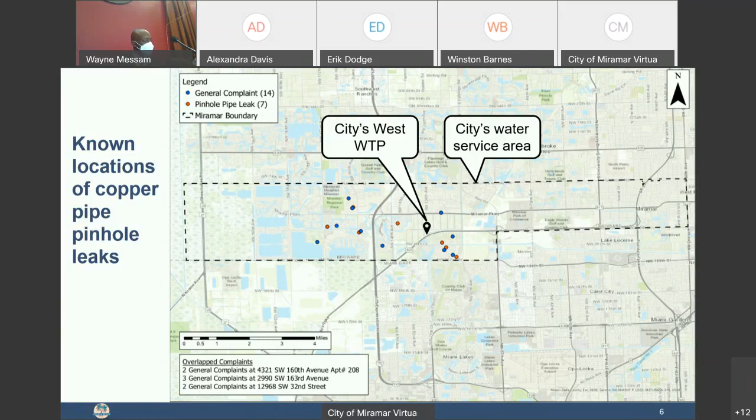This afternoon, we want to provide you with a status summary and an overview of the water treatment plant. Kimley-Horn will be providing a water quality review. Hazen and Sawyer will provide a review from a national perspective. And then I'll be back with you with some final recommendations.

But before we move forward, we do want to highlight some of the actions that our city has taken to date, some of the best management practice actions that we've employed.

The city has performed an operational review of our entire system. We met with the Florida Department of Environmental Protection. We retained experts from Kimley-Horn, national water treatment experts. We retained experts from Hazen and Sawyer, national water treatment experts. We collected samples of pipe with pinhole leaks throughout our service area. And we collected data on locations where pinhole leaks have been reported.

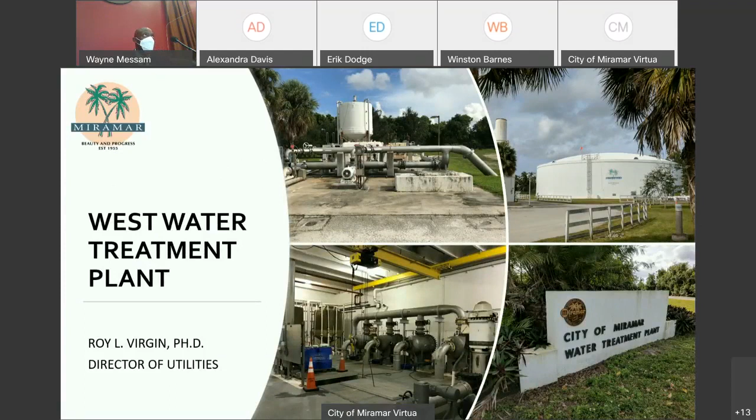I want to start by giving you an overview of the West Water Treatment Plant and also look at some of the water quality control parameters and some of the testing that we've done.

From the get-go, let me start by saying emphatically that the City of Miramar provides drinking water that is in total compliance with all the local, state, and federal standards, which include copper corrosion regulations. In addition to that, we have tested over 20,000 water quality tests per year to ensure the safety and protection of our residents.

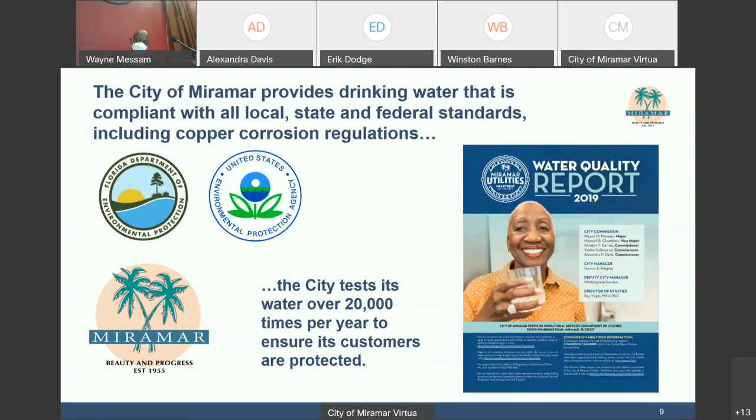So, the West Water Treatment Plant. This plant operates using what is called membrane softening technology in the treatment process. The plant was commissioned in about 1995 and since then has gone through several expansions. Total capacity of the plant is about 11.75 million gallons per day.

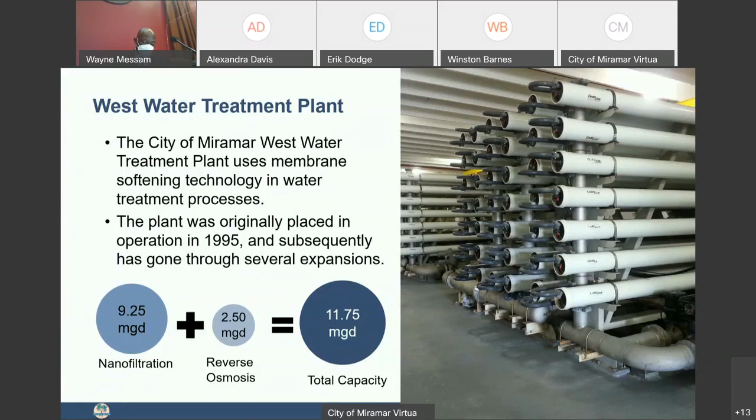Of that, 9.25 million gallons is from the nanofiltration process and 2.5 million gallons from the reverse osmosis treatment, combination of 11.75. So the question that residents may ask is, where do we get our water from?

Where does Miramar get its water from? So, Miramar water comes from really two places. One is what we call the Biscayne aquifer, and two, the Floridan aquifer.

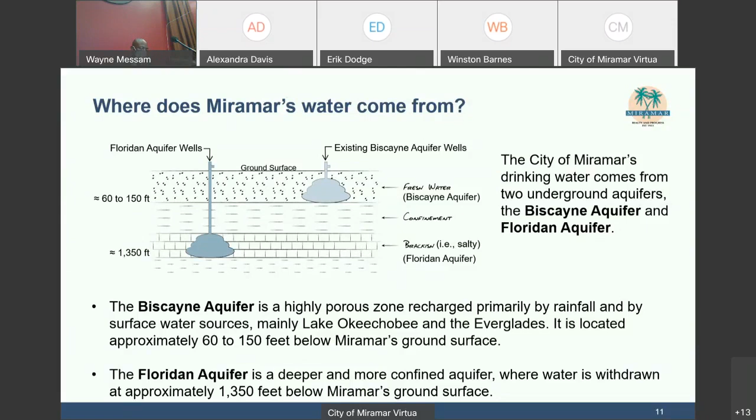These aquifers, the Biscayne aquifer, is a highly porous zone charged primarily by rainwater and surface water, mainly from Okeechobee. It is about 60 to 150 feet below our feet here in Miramar. In contrast, the Floridan aquifer is a deeper and more confined aquifer where the water is approximately 1,300 feet below the ground. So these are the two aquifers that the West Water Treatment Plant gets its water from.

So let's look at some of the characteristics or what the differences are in both freshwater systems where we get our raw water from. What we did, we examined approximately 9 parameters and looked at the comparison so that the resident can have an understanding of what is the Biscayne aquifer, what is the Floridan aquifer, and what are those water qualities. So we look at the pH, which is really potential hydrogen.

We note that for the Biscayne and Floridan aquifer, Biscayne is 7.17, or approximately 7.2 pH, and the Floridan is approximately 7.7, a little bit above neutral on the pH scale.

The conductivity, which we'll note on the Biscayne side, is about 732 microsiemens per centimeter. However, on the Floridan side, it's approximately 5,000. That's a huge difference. Remember, I spoke earlier that one is about 60 to 150 feet, and the Floridan is up to 1,300 feet. So one of the reasons why we check for conductivity is because it's the ability of water to pass electrical current. And also, as conductivity increases, so does salinity, or salt.

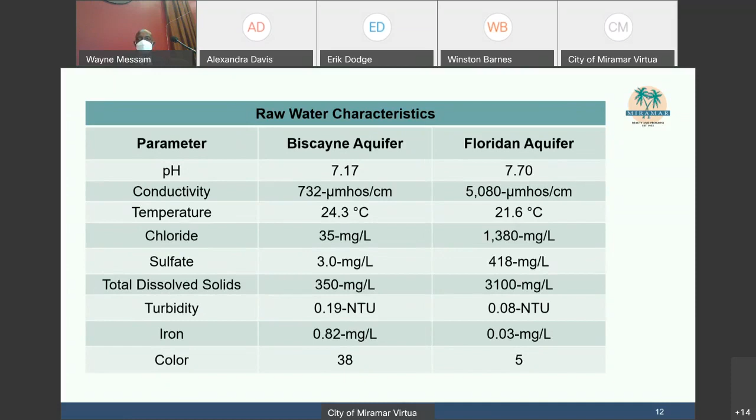We check turbidity, iron, and color. Those are pretty much within range. This chart here is really a flow chart. It shows the process, and in blue you can see that's the nanofiltration side, and in orange is the reverse osmosis side.

So what you see is that in the blue, we get the water which is the nano, from the Biscayne aquifer. From the Floridan, which is the reverse osmosis, we got the water from the Floridan well. It passes through pre-treatment, then into the membranes. Then what's left, we pump that reject water back into the ground about 3,000 feet. Then the water we need, called permeate, is not totally finished.

It needs some addition of what they call post-treatment from both sides, so it's blended in what we call the clear well. Then there's addition of disinfectant, fluoride, inhibitors, all that stuff added to it.

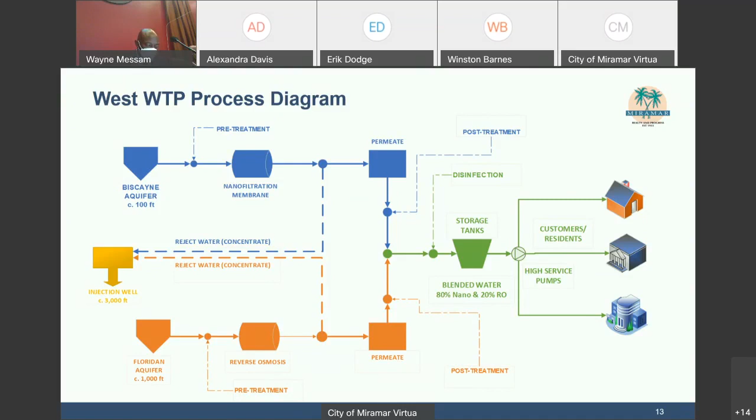Then from there, it goes to the holding tank. We have pretty much two on the west side, two storage tanks. We have 4.2 million gallons on site at the plant, and 3 million west of the 75. From there, it's pumped through your high service pump to your residents and customers. So that's the overview of how the process works.

Now, that is the hard work. But we can't make the water without having some quality control checks, and the water must follow the regulations set forth by the state and federal government. We can't just produce the water and send it out and say drink the water, use the water. It has to follow the guidelines set forth by the state.

So the City of Miramar has a certified water quality lab, certified through the National Environmental Laboratory Accreditation Conference and the Florida Department of Health. The lab holds approximately 85 fields of accreditation or certification in different areas such as microbiology and chemistry, and is certified to analyze drinking water, domestic wastewater, solids, and chemicals, and so forth. To the bottom right is a copy of the certificate from the state. So how do we monitor the water that comes through?

This is before I bring Kimley-Horn to speak on their side of the water quality. How do we monitor the water? The water quality is monitored continuously, done through a number of instruments, analyzers, different kinds of instruments that check different parameters.

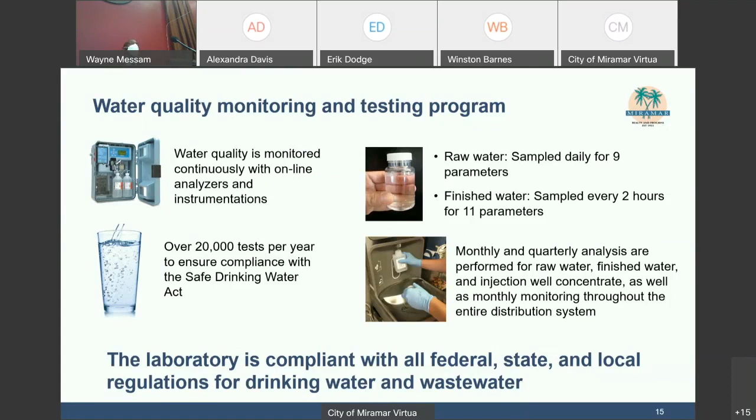But let me close before Mr. Kimley-Horn comes in by saying that the lab, the City of Miramar Water Quality Lab, is in full compliance with all federal, state, and local regulations for drinking water and wastewater. I want to thank you, and I'll have Kimley-Horn speak on water quality.

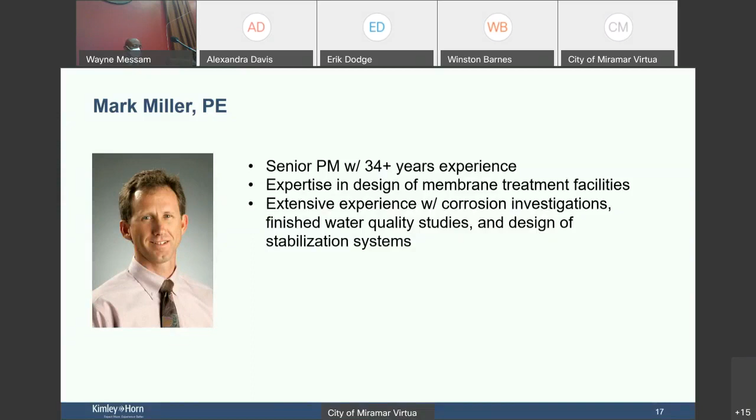My name is Mark Miller. I'm with Kimley-Horn, been with the company 35 years. Most of my experience is in treatment facilities, very similar to the system you have, a consolidated system with 2 different treatment plants, unlike any others in the state of Florida, with extensive experience with corrosion inhibitor studies and whatnot.

So I'm going to do a brief description of the water system. Roy did it pretty well. You have 2 regional water treatment facilities, different capacities, consolidated, serving both systems.

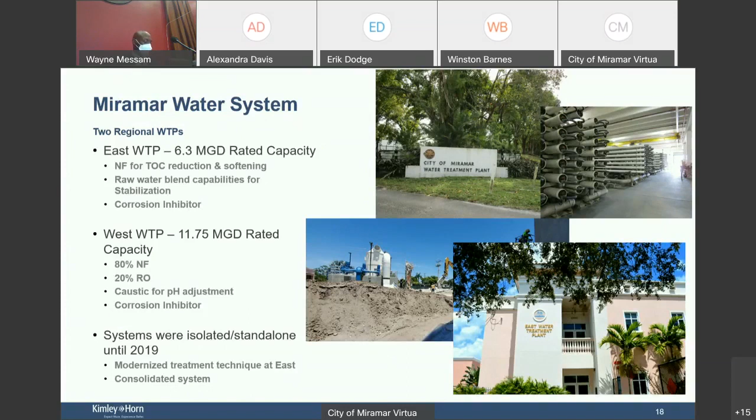These systems were isolated prior to improving the East water treatment plant and adding corrosion inhibitor to the East plant, and they are currently consolidated.

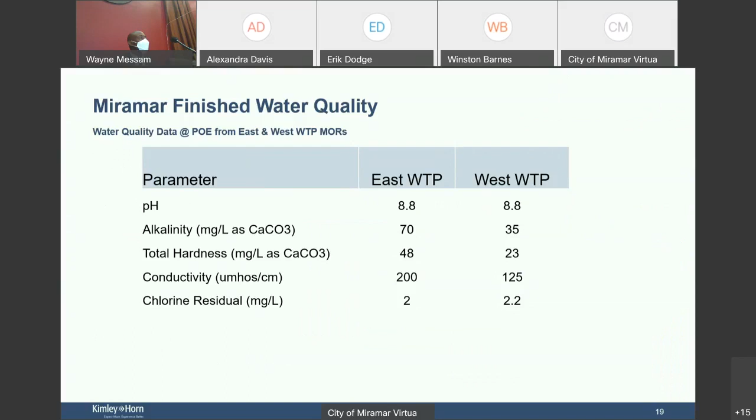This gives a snapshot of the existing water quality leaving both facilities. Most parameters are consistently the same: pH, chlorine residual. Alkalinity and hardness are a little different, but not any different than other consolidated systems in South Florida. One key issue is that this water quality is consistent; it's the same leaving both plants and doesn't vary much with the older conventional treatment technology we had before.

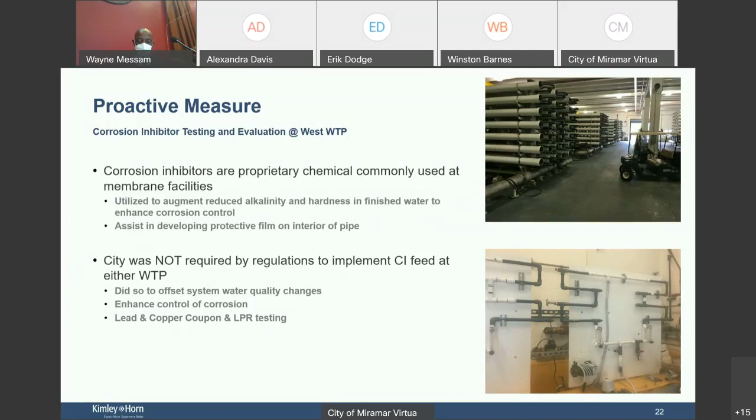It should be noted too that the city was not required by regulation to implement this, because as you could see by the lead and copper results, you're in compliance. But the city proactively offset the system water quality changes that would occur when the East plant came online and those valves were opened and connected, consolidating the system. Essentially, it was enhancing control of corrosion when the East plant was brought online and combined with that system.

With that, we were engaged with the city to conduct a corrosion inhibitor investigation and testing at the West plant. The goal was to enhance control and mitigate any corrosion. Corrosion can and will occur. The city understood finished water quality was going to change with the treatment change at the East plant, and that was the purpose behind this effort.

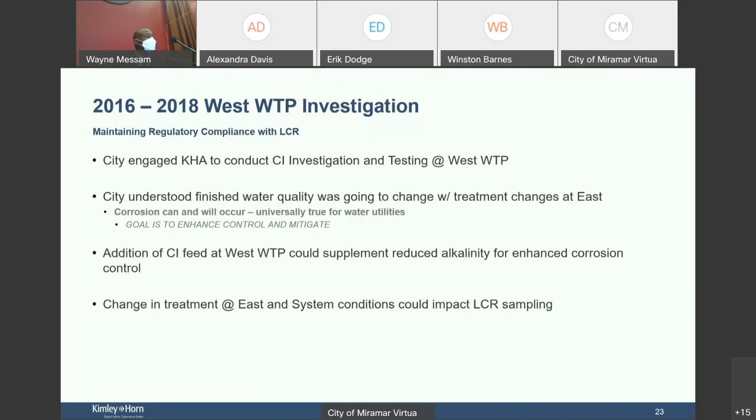The addition of corrosion inhibitor feed to the West plant could supplement reduced alkalinity for enhanced corrosion control. Corrosion inhibitor does add alkalinity to the system, and that was an important element. We knew that the change in treatment at the East plant would affect, or may affect, the LCR results, so that's why this was started.

When it first started, a desktop water quality evaluation was conducted. With our experience with many other treatment systems and utilities throughout South Florida, we identified other facilities that dealt with these issues, such as systems in Indian River County and Martin County utilities up north. They're very similar to your system.

We next conducted pilot testing using finished water from the West plant, injecting different corrosion inhibitors into the finished water, and then measuring corrosivity via gravimetric methods, weighing samples into coupons, and using an electronic version to look at what corrosion rates occurred with lead and copper samples. These were true, real coupons used in the testing.

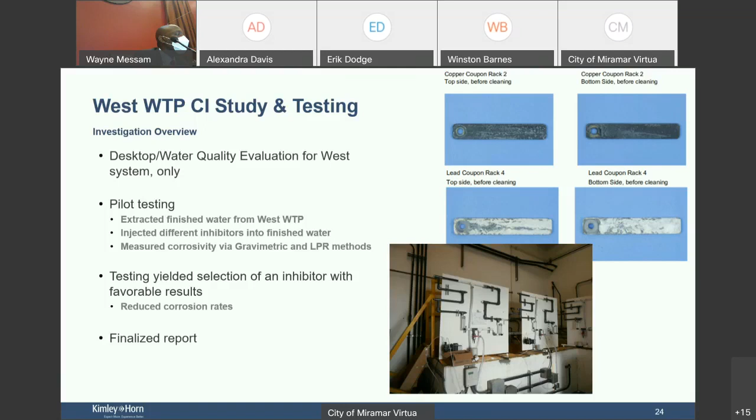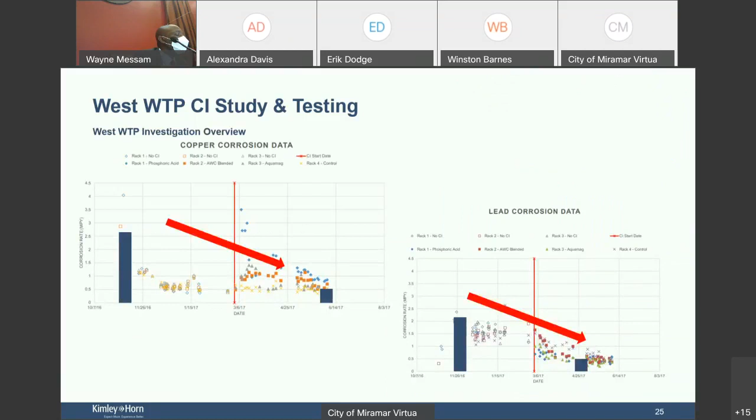What we yielded was a selection of inhibitors with favorable results to reduce corrosion rates. We just recently finalized that report. This is a snapshot of the results of that data, showing copper and lead corrosion did decline. The dots show the different types of corrosion inhibitors tested—phosphate, polyphosphate, different blends—but in the end we used the one best suited for that facility. You can see when it started in 2017, it did decline over time after adding that corrosion inhibitor.

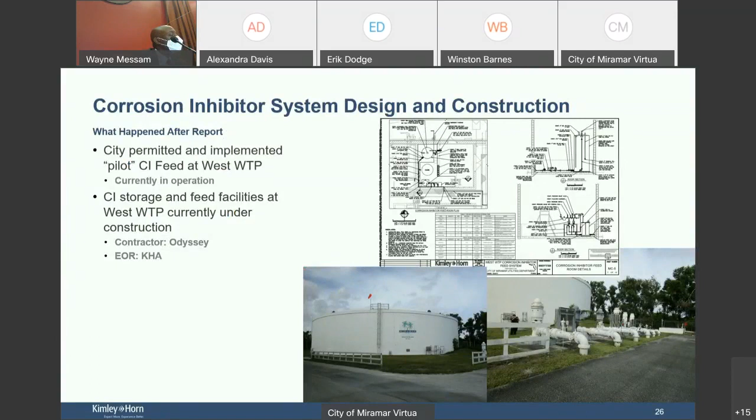Where we are right now: after the report, the city permitted and implemented a pilot, basically the corrosion inhibitor feed system continued feeding at the West plant and has been feeding since then. Currently implementing permanent storage and feed facilities at the West plant, currently under construction, with Odyssey and us as the engineer of record.

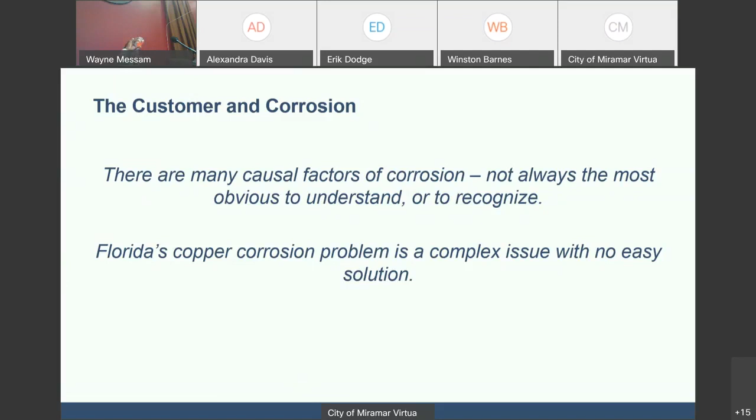Utilities themselves have a tremendous amount of infrastructure that's part of the financial health, so to speak, of any community that's a water purveyor. You have a tremendous amount of infrastructure that's out of sight, out of mind, but a lot of it is metal components. It's subject to corrosion because water is a solvent and it likes to dissolve metal and other things into it.

Because of this infrastructure, utilities themselves practice corrosion control because they need to protect their infrastructure, and in addition, they need to protect the consumer from exposure to contaminants.

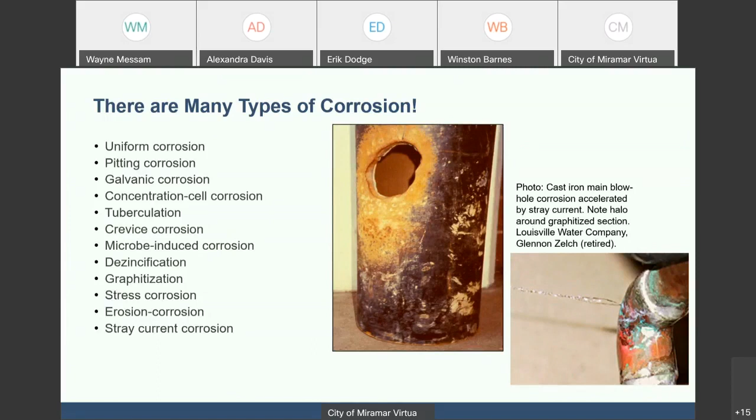The other picture shows corrosion leaks, and there's different types of leaks. You see it's an elbow. Water itself erodes—look at the weathering of rocks, mountains are removed over long periods of time, and they get eroded. Here's a picture of a copper pipe that had some erosion of the metal, which caused a leak. When you put a pipe in a home, it may take many years for you to see the leak. We're going to talk a little bit about how that happens.

Next slide. Here's a picture of a pipe that's been longitudinally cut. If you look in the literature, you can categorize 3 major categories of causal factors: dissolution, abrasion, and maybe metabolic activity, meaning microbial. We are a living planet, so there are microbial organisms that are in everything.

Some examples are like the water quality pH. As long as you have alkalinity in the water, it's not often a problem. Flux corrosion, workmanship, dissimilar pipes—a lot of different things can play into these factors, and no one issue is the causal factor. I'm going to talk a little bit about stray electrical current and lightning briefly, because Florida has the most lightning strikes in the world.

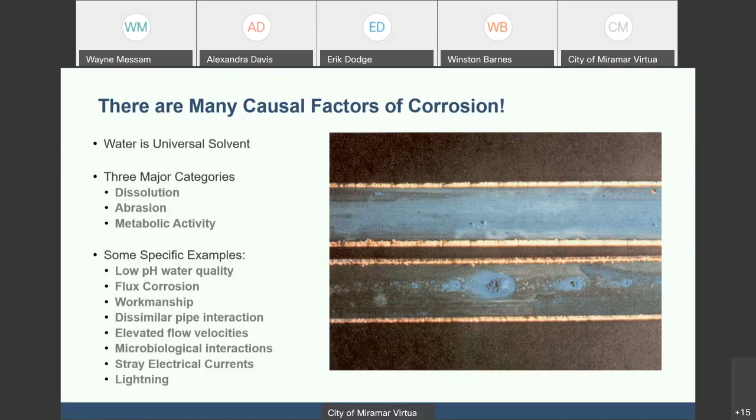There are factors that affect the way that we do our plumbing, how it's installed in a home. We're obviously in a warm climate where we use air conditioning a lot, but we do have a season that is very warm.

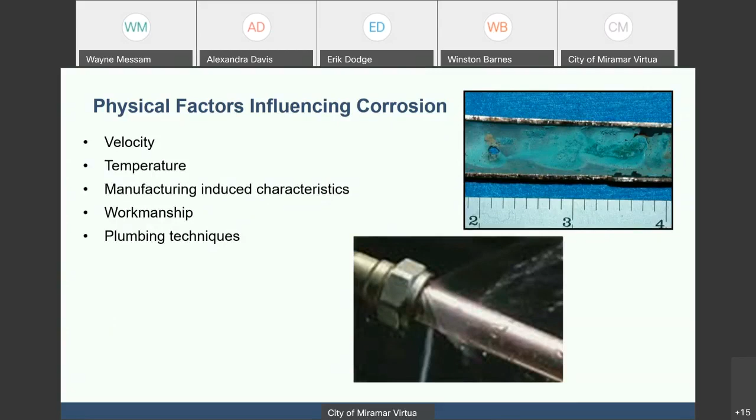Manufactured induced characteristics - we have workmanship issues. In fact, some of the peer review literature has shown that one of the major factors that contributes over the life expectancy of a home itself is anthropogenic, which means human interaction. And that's rarely discussed when we get into these issues where people emotionally respond to problems with their plumbing.

Next slide. So I want to share with you a couple of stories, at least my experiences with dealing with this issue and with people in their home. A major understanding is that people's exposure to a contaminant in a public water system is involuntary, which means that the federal government, the local governments, the health department, the regulations are there to protect the public when they drink water out of a water supply. Makes sense, right? And the amount of effort that goes into that is a huge effort.

So here we have a couple of different stories. So, pitting and the dead pine - that was in Polk County, Florida. There was an area in the Imperial Lakes water system, this is like 20 years ago, people were getting pitting corrosion in their home. And the utility, I would go out with the utility and we'd go meet with some of these people. A lot of them are elderly, retired, on fixed income. So when they have a major problem with their home, it's a big deal because of the financial impact on them, let alone the emotional impact.

So it turns out I go into the one home with the utility and this couple, and they're very nice. We talked to them after a while. It's a beautiful home, but the shades are all closed. Finally, she opens up the shade, and there's a slash pine in the backyard that's been struck by lightning. So I asked, well, when did that happen? Such and such. When did you notice your leak? The day after.

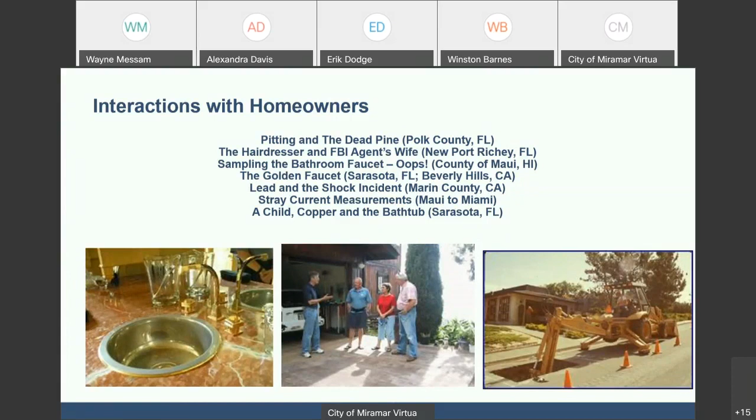When you look at copper pitting corrosion, here's a couple of pictures of what it looks like, produced by the EPA. When you move into a home, there's typically a certificate of occupancy that has to be issued. The financial arrangements have to go through, the bank has to offer, and an inspector, the county or city inspector, goes in and makes sure the plumbing does not leak. They don't check for the quality of the workmanship.

The power company doesn't come in and check the quality of the electricity in the home, for the type of TV you watch, or the type of music you listen to. The only thing that's regulated in the home that the public participates in is the lead and copper rule. The only law.

So you can see in these two pits, the copper pipe with this mound above it, that's the tubercle that's formed, and it's going to eventually break through.

So what happens is, between the time the certificate of occupancy is typically issued, a period of time goes by where the water sits stagnant in the home. And the way building codes are, and the way plumbing occurs, you can have a lot of different people involved in the plumbing.

As long as there's a master plumber available and licensed to do the work, they can do this. So there's no guarantee that a piece of dirt, with pipes lying on the ground during construction or even afterwards, doesn't get into the pipe.

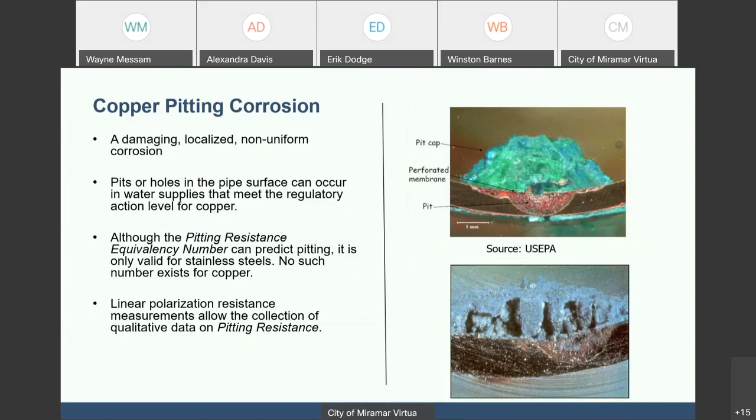And then the pit gets propagated as people use the pipe over the years. If you have a very thick wall pipe, you can get 35, 40 years, 25 years out of that home. You use thin wall pipe, much quicker. It takes a long time for the pit to occur. Once it's initiated, it doesn't stop. It can be slowed down. Use of inhibitors is always a good idea.

Lightning is shown to impact our plumbing. Dick Dunham, who was a chemist at Orlando Utilities Commission, when I was doing the stray current study, they had a study that they were doing for the American Water Works Association's Research Foundation, where they built a home inside their water plant to see how appliances and things affected the corrosion and how the water would affect the corrosion of a typical home. He said that every time lightning storms moved through the area, they were monitoring copper and lead constantly. The amount of copper in the water would rise until the storm moved away. Again, the utilities provided the same water while this occurred. Next slide.

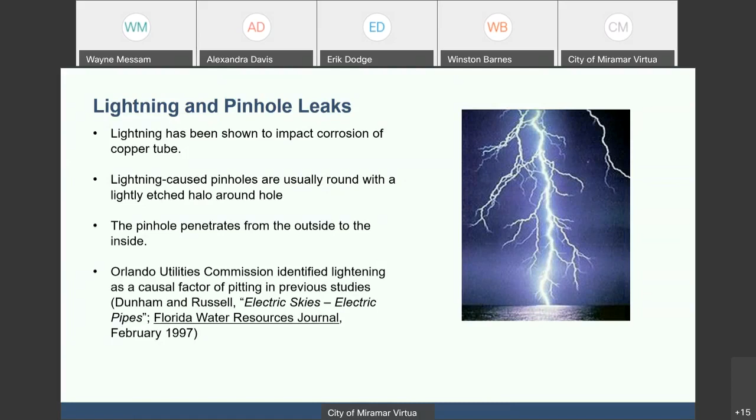So I've been involved a lot in Florida and corrosion in Florida over my career. Here's an example of what happens with this issue - typically people take the responsibility to fix their leaks. They work with their plumber and fix the problem, and it becomes like fixing your roof or fixing anything in your home. But then it gets elevated when people believe that their problem is the only one, that it's their system, their utility causing this issue. This is different, that's different, whatever the reason is.

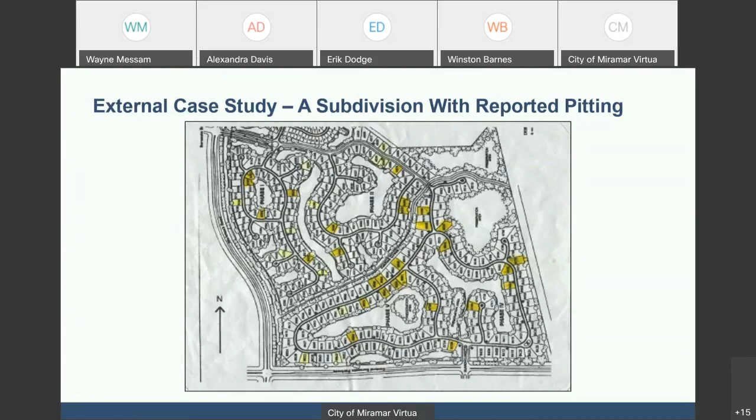Next slide. As it turns out, 6 of those homes that had the issues had problems with their grounding and the pipe. It was difficult for them to understand that it couldn't possibly be the water.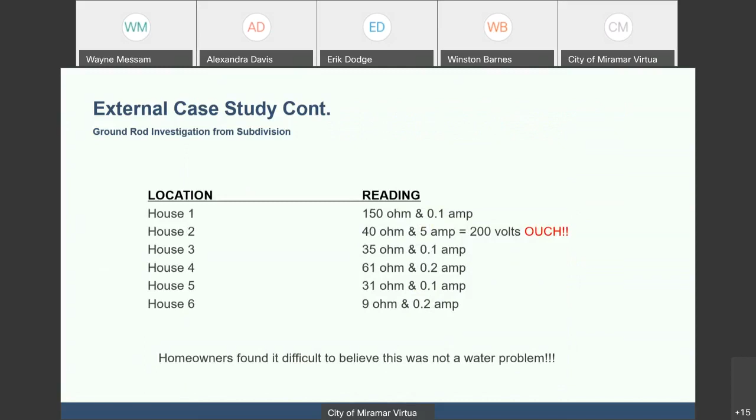Next slide. So the customer's viewpoint is typically different than the utility's viewpoint. The customer viewpoint is, the utility caused my problem. Rarely is it the plumber or the builder that's involved in those discussions? It's a traumatic experience, it is. I've had pitting in my own home and my wife not talking to me for a week at a time, blaming me for the problem because I work in the water industry. Difficult.

The problem's a local issue - it's not a local issue. It's a part of maintaining your home. Recurrent problems lead to frustration. Eventually it has a financial impact because the plumbing has to be replaced at some point along the line of the homeownership. The water utility's perspective is typically that it's the customer's responsibility.

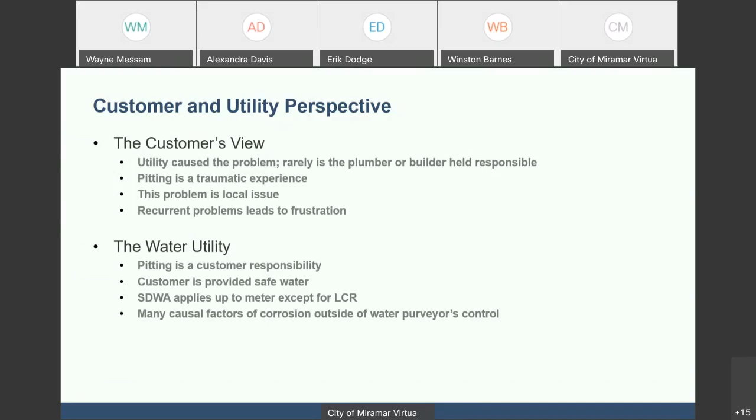It's on their side of the property line. We provide safe drinking water to them. Safe Drinking Water Act applies - protect public health from exposure to contaminants in their water supply because it's involuntary. And there's many causal factors of corrosion, and we have to embrace our consumer and public because we have this consumer confidence report that we have to generate every year to make sure we are open and disclosing to our consumers the state of the data on their water quality, by law.

Plumber's perspective, after working with many plumbers over the years, when I couldn't get them to talk to us, usually we had to separate the people and get a rapport with them for them to actually discuss these issues. 99% of leaks, the plumbers knew this occurred in this thin wall pipe we now use because copper is expensive and the plastics industry is taking over the market of home building, the PEX industry and other types of plastics. So they have to compete in this global business, billions of dollars of business.

And the builders are involved. So if you have a thin wall pipe, once the propagation occurs, it's just a matter of time before it occurs. Again, if you have a thicker, more expensive type of pipe, it's going to take much longer for the pit to occur. Very few leaks are noted until a long period of time has passed in the home - 25, 30, 35 years, maybe even longer, with the thicker class pipes. Builders don't typically use that anymore because of the expense of copper.

Water heaters are another area of concern. The AARP has told their members, hey, you can save a couple hundred dollars a year if you just turn down your water heater a little. But if you do that, biological growth can occur in the water heater and then send that into the home.

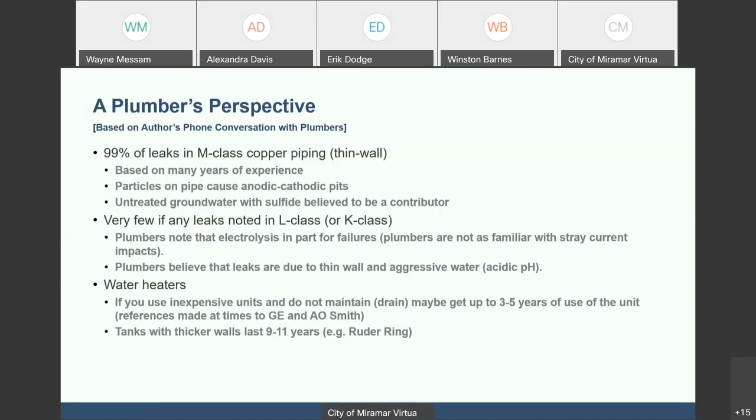So what are the repair options? Most people will get their plumber, put a hole in the wall and fix it. They clamp it on, have to have someone come back and fix the wall, and then pay a modest amount of money to solve the problem. And if it continues to be a problem, it gets to the point where the homeowner is frustrated and has to start talking about replacing their pipes or replacing sections of pipe. And there's no guarantee that there still will not be corrosion in the future.

Some people are sold on the idea that they can treat the water better than the utility, and that leads to a number of problems in a person's home, because they don't necessarily maintain that equipment like a utility maintains for all of the consuming public. A major responsibility.

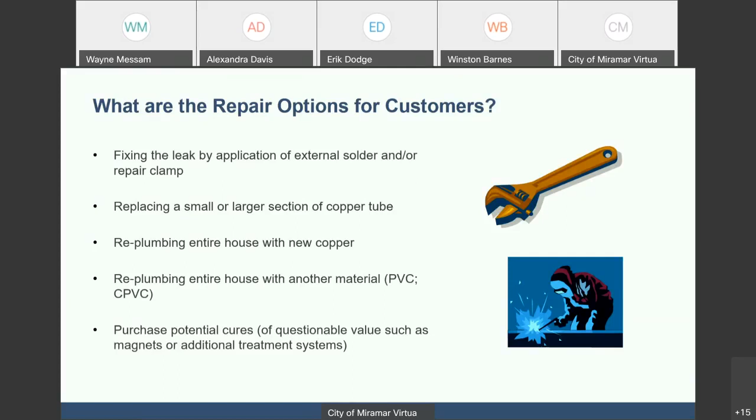So, 20 years of understanding this is a huge problem in Florida. Back in the late 1990s, early 2000s timeframe, the state initiated a study. It was a University of Florida professor in the building industry who led it. I go to these meetings - I wasn't part of the actual study, but we'd go and participate in the discussion. And copper is a significant problem for the United States.

The other thing it talked about is that the emphasis of the water purveyor's responsibility is to provide safe drinking water. That is their responsibility. And the responsibility for taking care of the home is the homeowner's responsibility - the resident's, or the owner of the building or structure's responsibility.

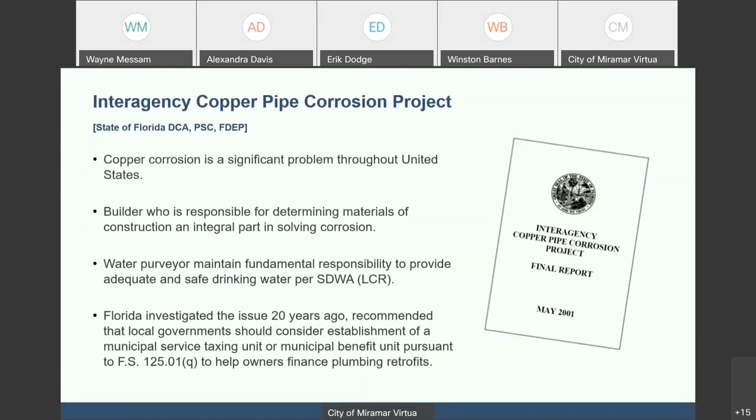And to help people with this ordeal, because of the financial impact to them - it is a huge financial burden to people that aren't expecting it - through state laws there are methods which, in your proactiveness of just working with your constituents, you already have similar programs, I think, on the wastewater side, where you can work with them to help them solve their problem.

So three notes I'd like to leave with you to wrap up my section. The water purveyor, whether a private water system or a public water system, is not responsible for the integrity of what happens in the home. They're responsible for compliance with federal law. Secondly, there are many different types of corrosion you're dealing with, and it's very complex, with a number of reasons why it occurs.

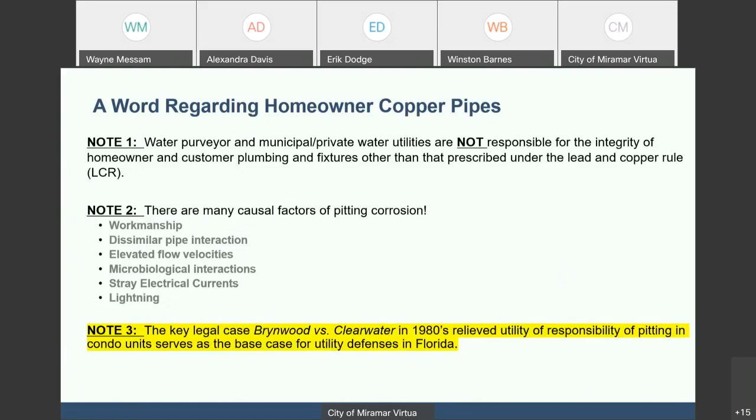Unfortunately, I have to mention that because when people get emotional, it's very difficult to discuss rational solutions with them. And you, as elected officials, know this to be true when you deal with your constituents all the time.

Continue your compliance with the Safe Drinking Water Act, because that is the mission of the utility - to protect public health from the water in the water system. Because again, the exposure to contaminants is involuntary in any of your public places.

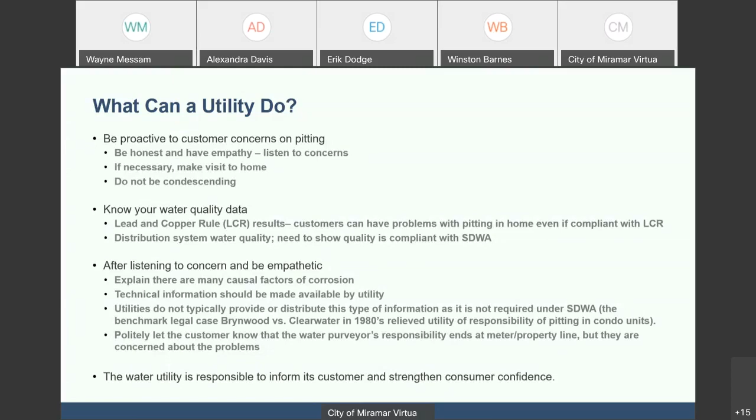Explain the things that we're hearing today, and make sure that they understand that unfortunately the water utility is responsible for the water quality and meeting the law, and the homeowner and building owners are responsible for the structures which they own.

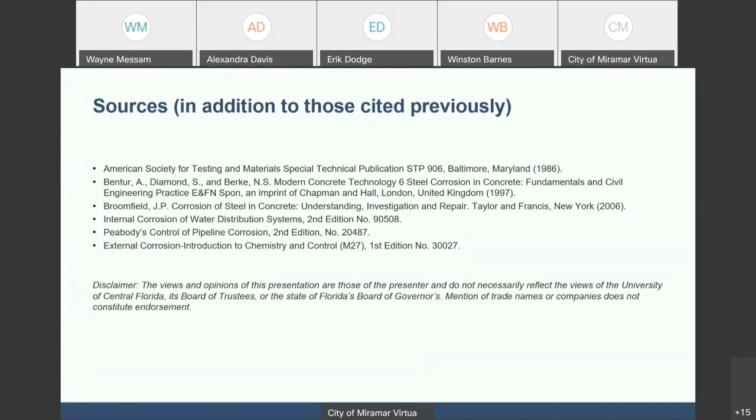Here's some sources, and since I'm a professor, I have to make this disclaimer that these are opinions of me as a professional engineer and a professor in the state of Florida, and may not represent the Board of Governors, my president of the university, the Board of Trustees, and those types of persons. And with that, I appreciate your patience with this discussion.

Good afternoon, Mayor, Vice Mayor, Commissioners, City Manager, City Clerk, and everyone listening on the phone right now. My name is Patrick Davis. I'm a Vice President with Hazen and Sawyer, and I've been working in the water industry here in South Florida and around the world, designing and optimizing water treatment systems for more than 40 years.

I've also had the great good fortune of watching the City of Miramar system develop almost from inception. And I'd like to, before I introduce our second to last speaker today, Dr. Bill Becker from Hazen and Sawyer, pause for a moment and offer a little bit of perspective historically and provide some context for the discussion we're having today.

Now, we heard from Dr. Virgin exactly what the water quality is that is created at your east plant and at your west plant. And we heard from Mark Miller of Kimley Horn the research and the science the city has been going through recently in order to optimize the system. By the way, all water systems all over the world always have to be optimized.

Water does not stay the same. It gets hotter, it gets colder, people move in, people move out, demand patterns change, the age of water in a pipe can change, and this all has an impact on water quality. A good utility is one that watches, pays attention to that, and stays up to speed with that. The City of Miramar has been doing that, and Mark's data, I think, illustrated that.

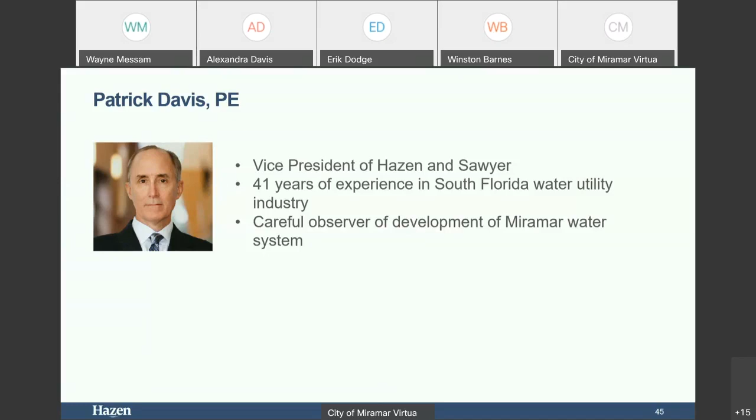I'd now like to introduce Dr. Bill Becker. Dr. Becker is the director of Hazen and Sawyer's National Drinking Water Program. He's out of Colorado, and he came in today to participate in this workshop with us. So, Bill?

Thanks, Pat. Hello, Mayor and City Council. For those of you that don't know about Hazen and Sawyer, we are a national firm. We design water treatment plants all across the world. Locally here, we've done a lot with membrane treatments, and we have one of the most robust applied research programs in the country. We do help utilities throughout the country optimize for the lead and copper rule for other corrosion issues. I've been at Hazen for 20 years, as Pat said.

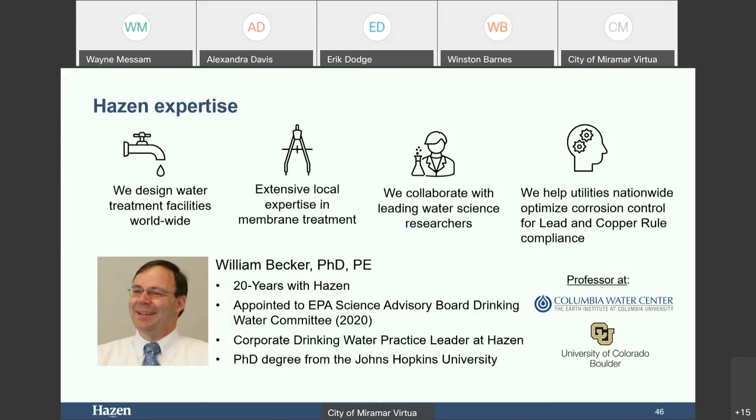I want to spend a little time talking about 3 case studies, but also give you a little background information about the Water Research Foundation work that's been done. For those of you that don't know, the Water Research Foundation is the premier funding agency for drinking water quality issues around the country. They sponsor millions of dollars of research on an annual basis. They work with EPA and other funding organizations. And they've done a series of reports on copper pitting corrosion over the years.

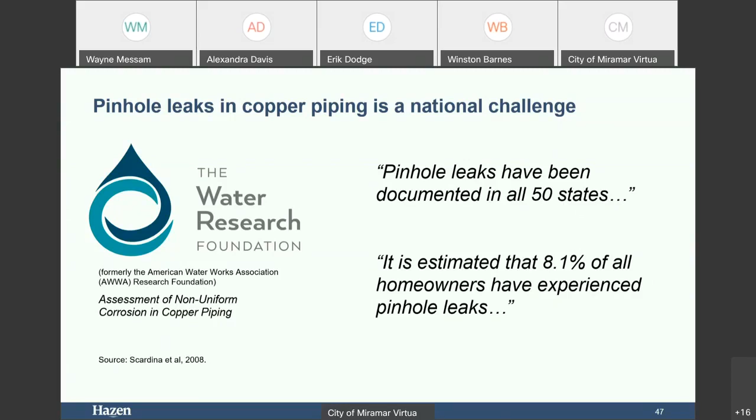Quoted up here are some results from one of those reports back in 2008. They've documented that pinhole leaks have been found in all 50 states, and it's estimated that about 8% of homeowners across the country have experienced pinhole leaks. This is a map from that report, showing where the leaks have occurred, the ones they studied, and they estimate that about $1 billion a year is spent repairing those leaks.

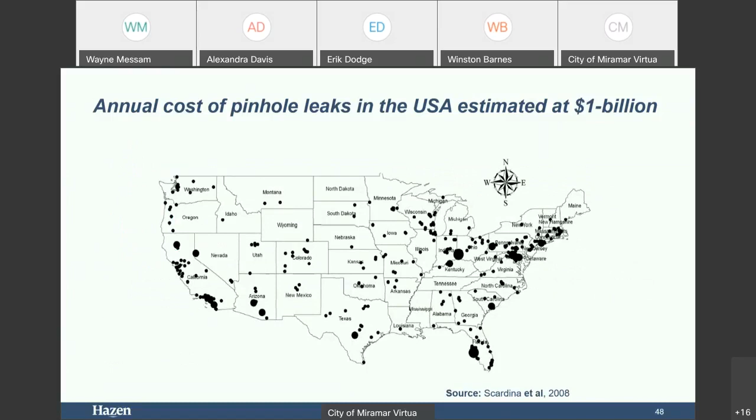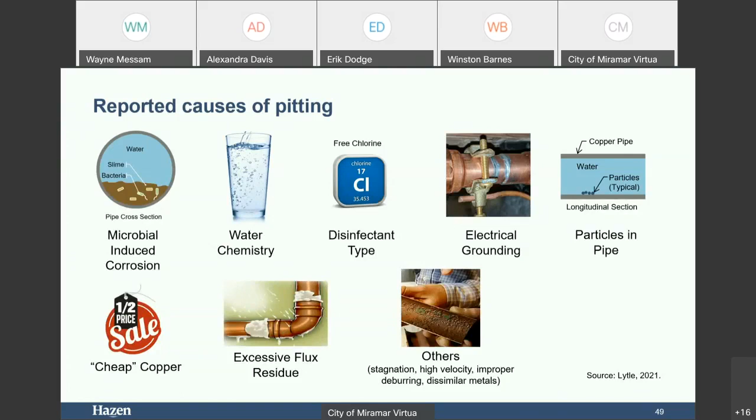As Professor Duranceau pointed out earlier, there are a lot of different causes of pitting corrosion. They span the range from different water quality type issues, to electrical factors, to materials, and to workmanship itself. And what these studies find is that there are multiple causes, and those causes and solutions are really complex.

Darren Lytle and Mike Schock from EPA have done a lot of work on this over the years. Here's some quotes from a couple of papers they've published in peer-reviewed literature, where it says reliably establishing the underlying source of the pinhole leak problem is complicated. It goes on to say it's likely many causes, as we've presented here today, and that there's really no simple way of reproducing and studying all those causes.

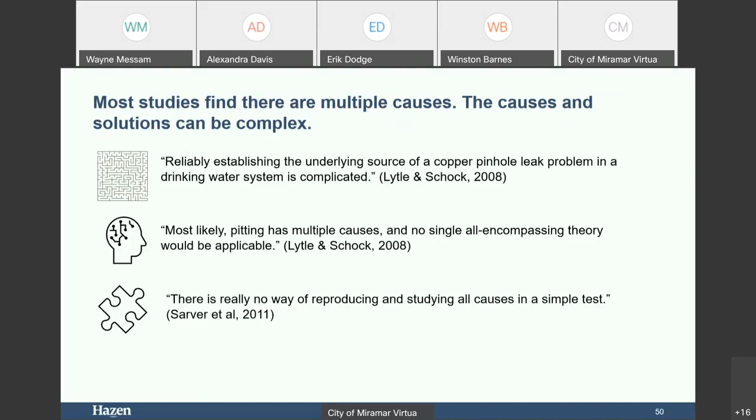So 3 case studies I want to briefly mention. One is a very recent study in Folsom, California. This last year, they identified pinhole leaks in residential plumbing. They immediately retained the services of 2 engineering firms and engaged Marc Edwards Research Group at Virginia Tech University to do some scale analysis on pipes, and then produced a final report.

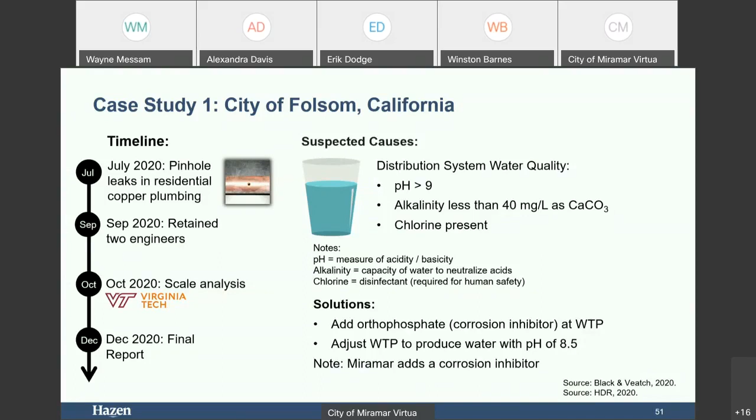In their particular case, the causes were attributed to a distribution system water quality that had a very high pH and a low alkalinity and chlorinated. The solutions put forward were to add orthophosphate, which is a corrosion control inhibitor at the plant, and to adjust the pH downward slightly. I should note, as was presented earlier, Miramar does already add a corrosion inhibitor.

Second case study is from Washington Suburban Sanitary Commission, which serves the Prince George's and Montgomery counties outside of Washington, D.C. and suburban Maryland. They had massive amounts of pinhole leaking back in the early 2000s. In fact, over 5,000 pinhole leaks were identified at the time.

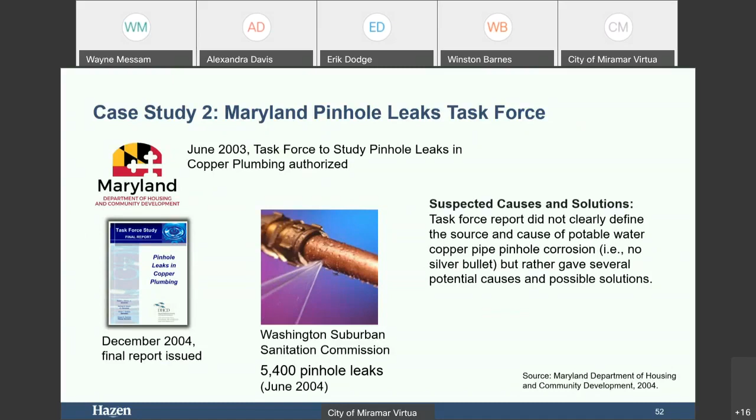The Maryland Department of Housing and Community Development did a whole report on this, and there were several other reports done by engineering firms as well. While this particular report didn't clearly define the source and cause of potable water pinhole leaks, they did give some potential causes and solutions. This is in line with everything you've heard today—it's really difficult to pin it down to one particular issue. In their case, they also decided to add orthophosphate as a corrosion inhibitor at that time.

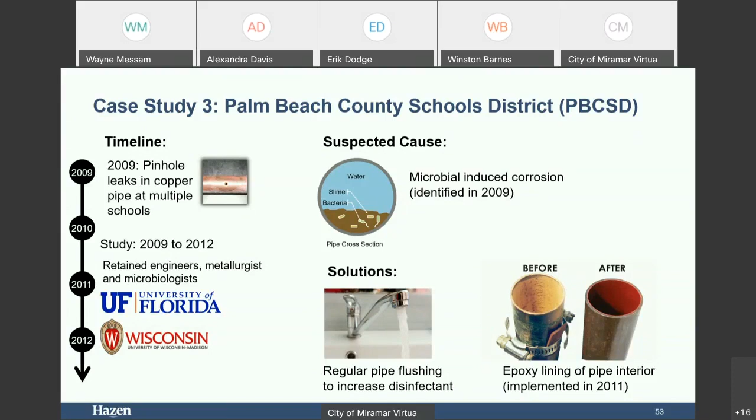Everything you've heard today kind of boils down to this: it's a very, very complex issue, and it requires a careful and methodical analysis—everything from looking at electrochemistry, water chemistry, conducting bench pilot studies, field observations, corrosion scale analysis. A lot of different things go into developing that sound understanding of what the cause is, and that's important to do before you can develop the best solutions.

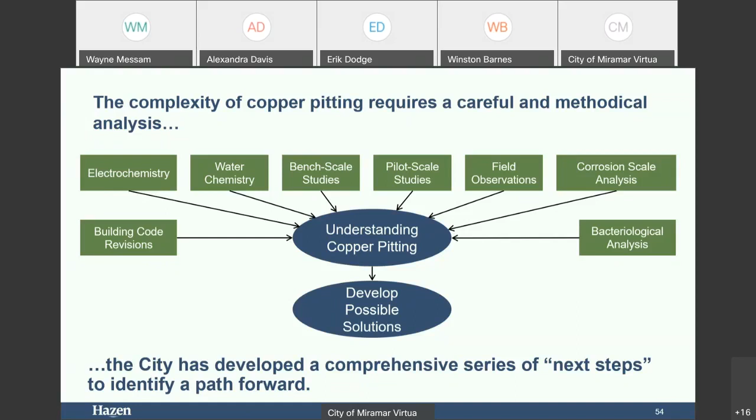So far, the city has developed a comprehensive series of next steps to identify a path forward, and I'll turn it back over to Mr. Kelvin Baker for that.

Thank you, Dr. Becker. This evening, Mr. Mayor, Vice Mayor, and Commission, we provided you with a status summary and an overview of our current system. We've heard reports from experts, from Kimley-Horn, and we've heard a national perspective from Hazen and Sawyer.

The million-dollar question is, where do we go from here? The city remains committed to helping its residents with this and any other issue related to water. We'll continue to take the following steps: we maintain compliance with our drinking water standards, continue data collection, and continue best management practices for system optimization.

Review legalities of potential building code changes, plastic versus copper pipe. Establish a city website on copper pipe pitting to share information with the public, as we certainly will make these materials available to our community. We have a helpline available to allow our community that's experiencing these problems to call and share with us their concerns. But again, our commitment is to remain proactive and provide the experts in the areas that are needed.